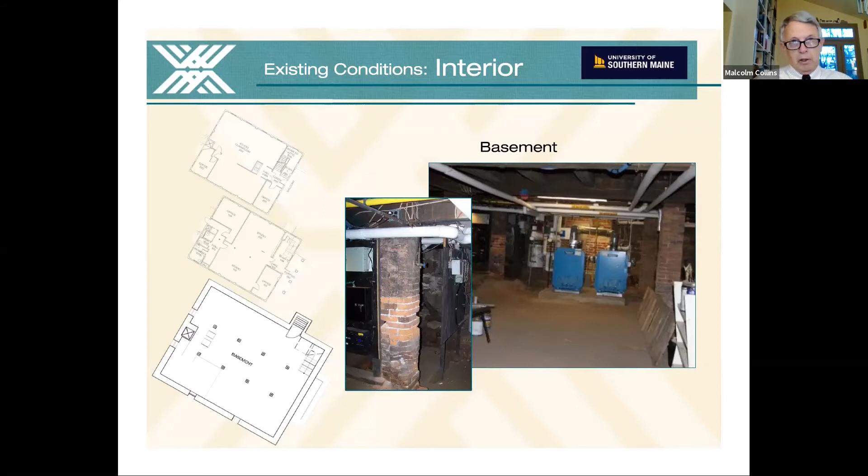Nothing, just the examples of the heavy timber framing in quite good condition. Foundation walls of granite rubble faced with granite slabs on the exterior and brick on the interior. Very little water damage. There was some evidence of some movement on one or two of the walls, but nothing out of the ordinary. Next slide.

And here you see some details of the foundation. One of the fun parts of HSRs usually is getting to draw up fairly accurate base drawings. Rarely do they exist, particularly for a building of this vintage and this sort of rural vernacular federal style building. But of course, as you can see here, there have been modern systems introduced into the building.

But on the upper right, you see the granite slabs that provide the exterior face of the foundation. Just some grouting and mortaring problems there to speak of. Nothing terribly significant. Next slide.

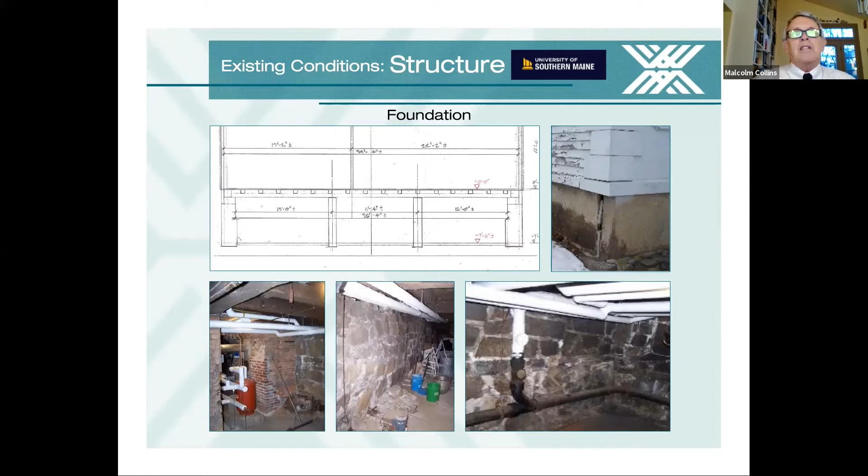At the interior, this building, when we get to the exterior, I'll talk a little bit more about its significance and its importance. But the exterior, for a town of Gorham's size and sort of the frontier nature of it, is quite a grand exterior. But the interior was very plain, and to the extent that we could do interior research, we really didn't find any. We were not able to do color analyses and decorative finishing analyses.

So we don't know, for example, if the stair hall was originally decorated with paint or gilding or anything of that sort. But still, there are a few flourishes, like the decorative trim underneath the stair treads, and the stairway would have been the only space of any decorative interest. You see the floor plan there.

In the original plan, there were only two spaces. The little office down in the lower right-hand corner may not even have been constructed originally, but was built within a year or two. And then the rest of it was just an open space with the stairway in the corner. And there was a two booth privy on the back of the building, which would be the upper left. It's no longer existent, but we know it was there until well into the 1890s, and probably later than that.

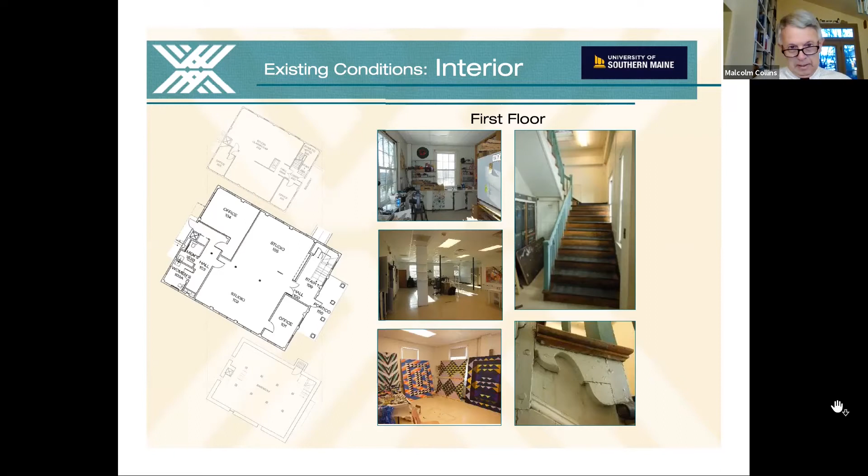It's quite a flexible space for them, you know, big space with 3 columns in it, 2 columns in the major studio space. So quite easy to use. And if we can go to the second floor, next slide. Second floor is even better flexibility wise because the massive trusses that hold up the roof and the ceiling made columns unnecessary at the second floor. So it's a wide open space.

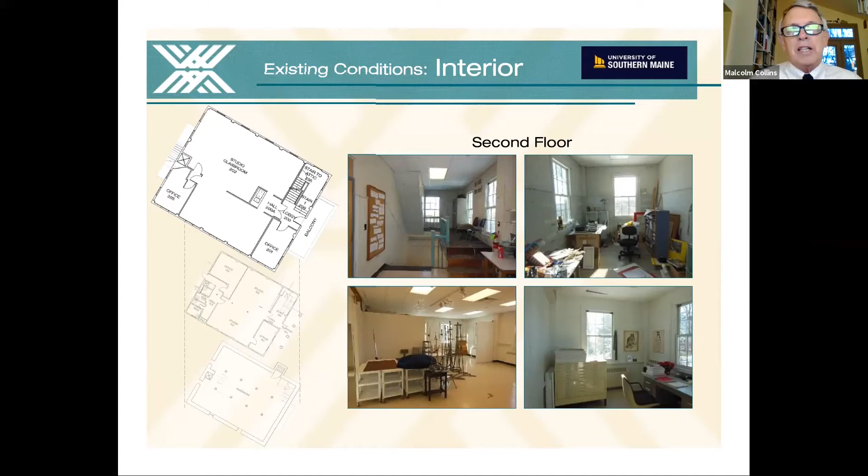The stairway was enclosed probably around 1822, and the office remains there. And then in the more recent past, another office was added to what would be the southwest corner. Again, you can see what seems to be comfortable living arrangements for a couple of faculty members and great studio space for the students.

Next slide. So the structure, I'm not going to get into too much of that because I'm not the expert, but it was quite heavy wood construction. You can see the basic outlines of it here. In pretty good shape. The usual problem with these kinds of structures, which were built with quite large cross sections of heavy timber, as you can see in the photo in the upper right, is, of course, the section modulus of them, in other words, their proportions of width to height, was not very conducive to overall strength.

So in the case of this building, there's some 12 by 12s, which sound like they ought to really be able to support a huge load, but in fact, because they're square instead of rectangular and they don't have enough strength in tension on the underside, they quite often need reinforcement if they need to be brought up to current codes. In this case, because we are not changing the use of the building, and, you'll see when we get into recommendations, we're not proposing huge changes, we will probably not be required to do much in the way of reinforcement.

Here's a picture. Go ahead, Ellen. Yeah, this was a really interesting structure. It's basically a timber frame. So there are columns within the walls. They kind of jut into the space a few inches, probably jutted in a few more inches originally, but there's been some material put on the walls to use for tacking and whatever.

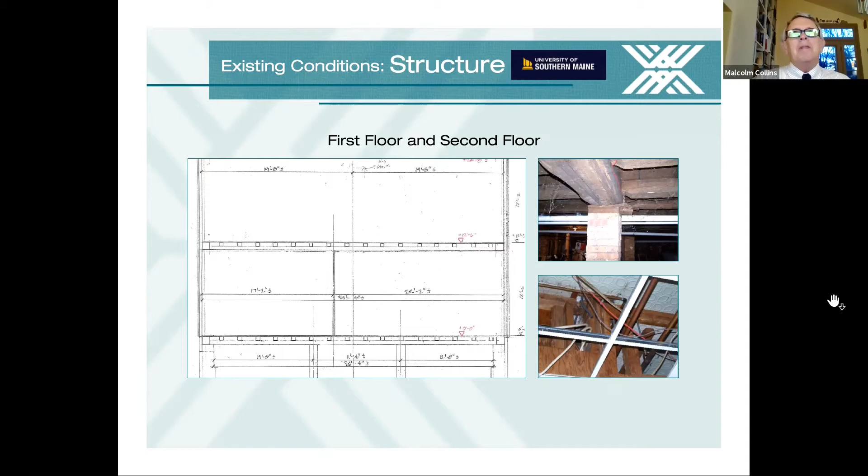Okay, thank you. Next slide. Next one. Thank you.

HVAC and electrical, mechanical, I won't spend much time on that. It's basically all new systems, reasonably well introduced into the building in terms of impact on character defining features. I certainly can't say it's terribly efficient in the overall scheme of things, but they have managed to keep the building serviceable. It should have some energy retrofitting. There are things that can be done without damaging character defining features that will be part of some of the future projects.

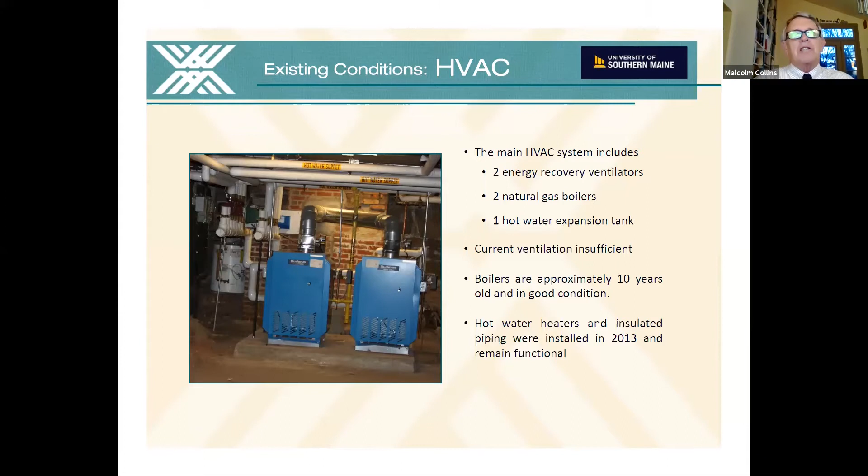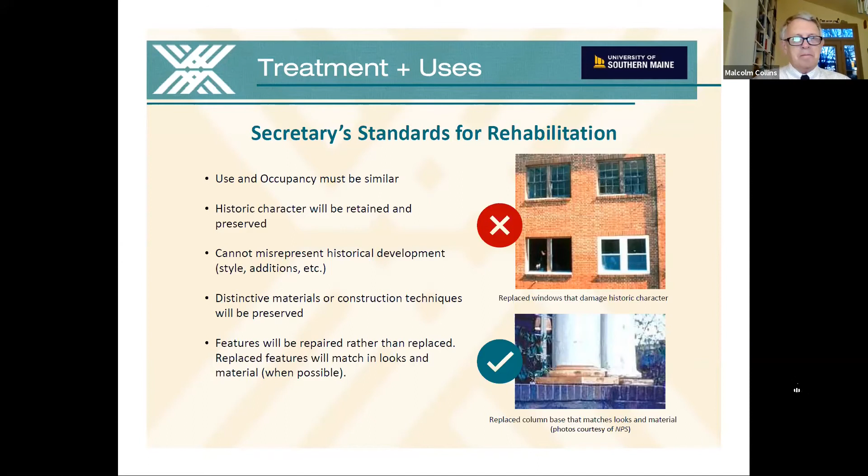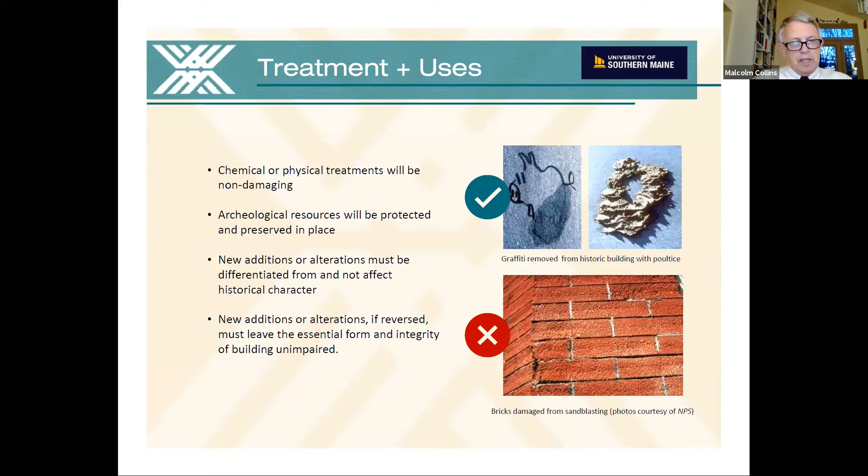Next. So based on the existing conditions analysis and the consideration of the different treatments, and choosing preservation on the exterior, rehabilitation on the interior, if we had to choose one to apply to it, it would be rehabilitation, because the preservation can fall under that. We were asked to make recommendations on projects to bring the building up to its original conditions, really, and then to allow the interior to continue to function in its current use.

So we developed several projects. Those of you familiar with the funding issues at the university system will understand that they hoped that we could put our recommendations in terms of several small scale projects that could be budgeted over a period of years based on priorities we helped them establish. And so that's the direction that we took. So I'll describe the projects a little bit. Project one, next slide, please.

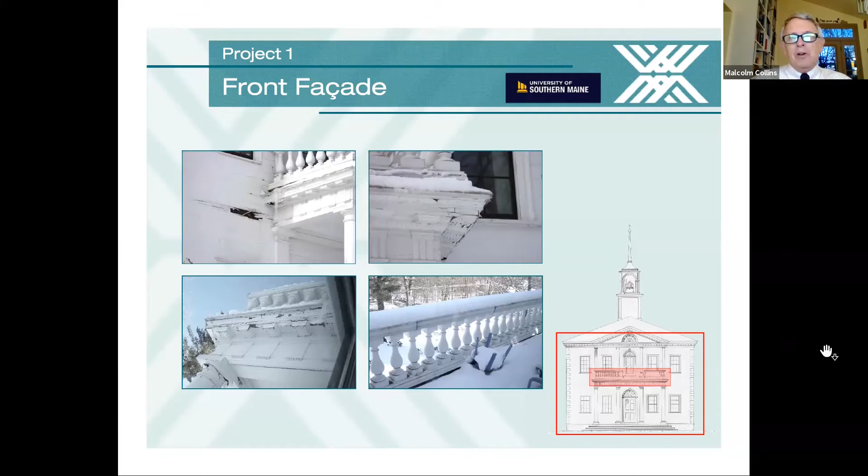Project one looks at some of the issues that I mentioned, and the red rectangle around the little elevation in the lower right-hand corner shows this is the east elevation, and this will be the first project. These have the most imminent repair issues. In fact, the column on the right-hand end of the portico, when we first visited the building, was lying on the ground. And so they recognize the importance of restoring that front elevation, not to mention it puts a good front on the project, very prominent location, highly visible, showing that they are being good stewards of the building, and also hoping that they'll get some fundraising help. Next slide.

Some more down at the front porch level. The front porch deck is some very large granite slabs. As near as we can tell, there's not a whole lot of structure under them, but we were not really able to get access to what's under there as part of the project. But rotting at the bases, the slabs moving around, the step treads needing some work. So that's project one.

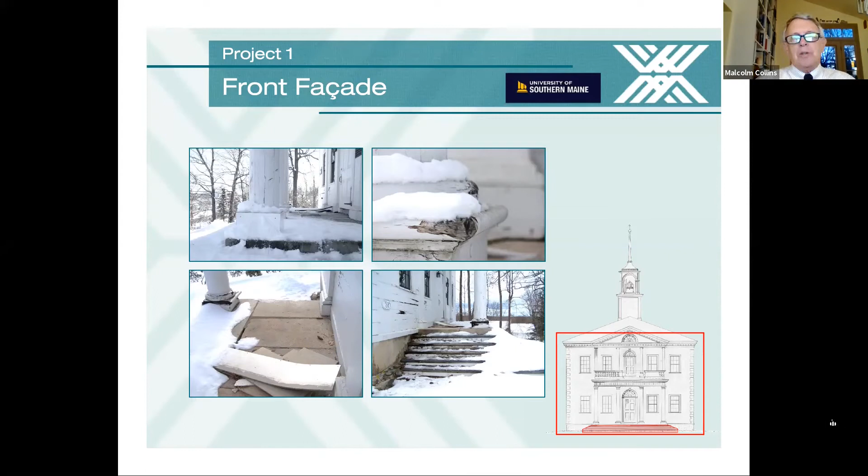Next slide. Project 1A involves going up and getting into the pediment and the balustrade and the roof of the portico, with gable face and details and flashing trim, of course, roofing, porch railings, the soffit, building siding, and painting above the second floor. So a fairly extensive project, but a really worthwhile one. Next slide.

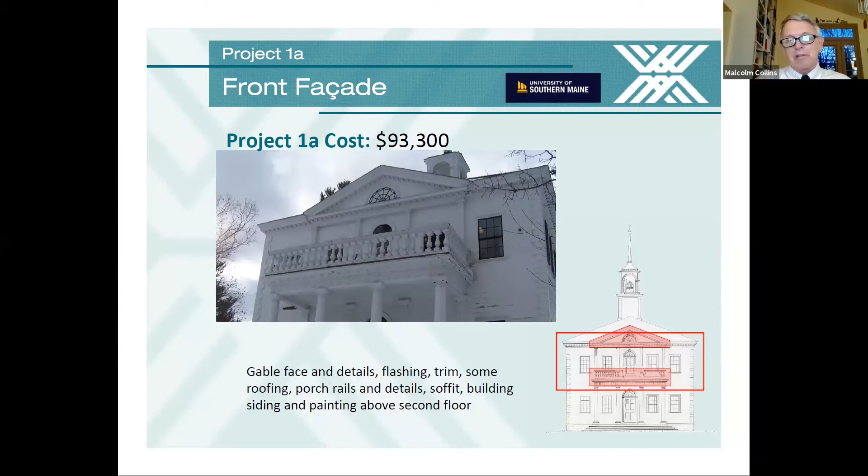And you'll see the cost estimate there of $93,000. A very important part of the project, and typically of an HSR, is to do some cost estimating once you've developed your recommendations for scopes of work. We hired a cost estimator and had a very thorough process applied to these projects, and we're pretty comfortable that they're realistic. And the client, the owner, was quite pleased with the scope and the size of the various projects. Next slide.

So then project 1B for the lower part, the steps and everything, next slide, worked out to be just about the same number. So about $180,000 to do the entire facade. Next slide.

Then we continued on the exterior for the next project, siding restoration. Much of the siding was in, I'd say, fair to good condition at best. There is quite a bit of it that may need to be replaced. We'd like to leave as much original up as we possibly can. You see the sort of feathered joints of the clapboards, the horizontal joints, which when they were new and painted, you couldn't even see any joints in the clapboards. So we'd like to get back to that as a character defining feature. Next slide. And so for exterior siding, we're looking at about another $85,000.

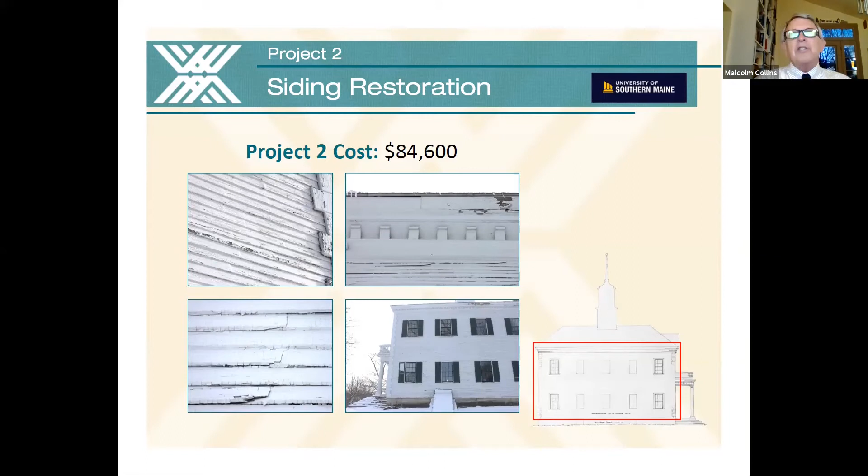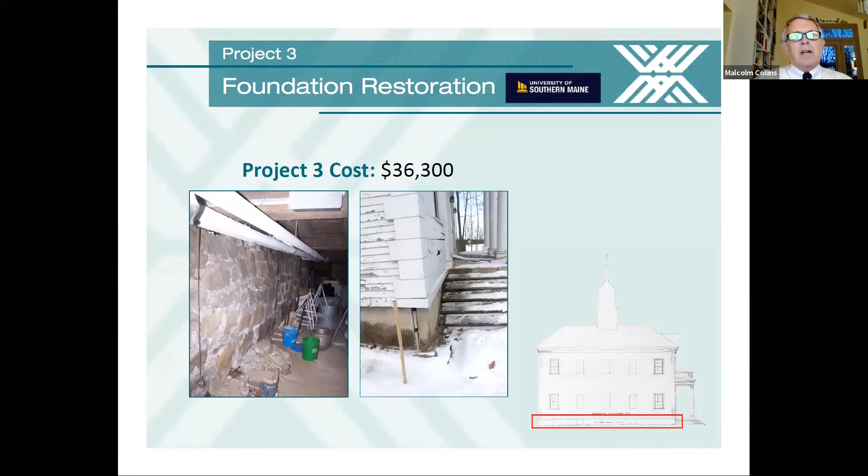A fairly significant amount, but again, not anything we would not have expected. Next slide. So the costs there are about $36,000. Next slide. And then going up to the top of the building, the roof and the cupola. We were not able to evaluate that as much as we would have liked, because at the time we were doing the condition analysis, the roof and everything was covered with much more snow and ice than you see there. But we were pretty sure we have a pretty good scope of work on that. Next slide. And that comes out to be, say, $50,000. That's really the end of the preservation-oriented work and restoration-oriented work.

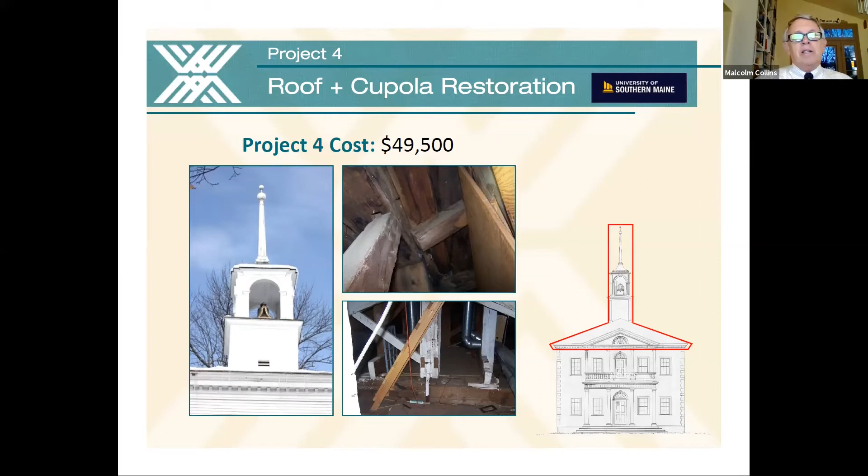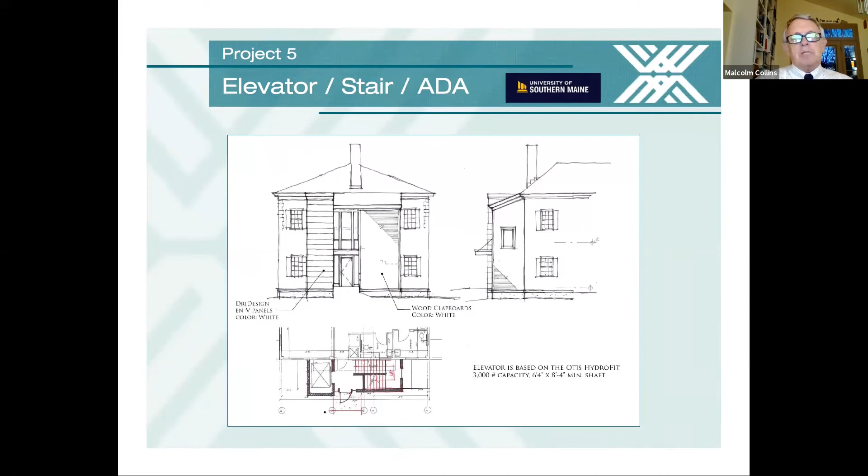Going to the next slide shows moving into something probably further out, certainly after the other projects are finished, in the place of where the Privy Tower used to be. We're proposing to put a stair tower and elevator. There is no elevator now, and the second means of egress is a fire escape on that back side of the building. So this we would see as a fairly important project to be put in the budget down the road a little ways. Next slide. And that project would be a little over $400,000.

And then one more project. I mentioned that the stairway would appear to be the only place where there was really much in the way of potential for decorative work in the past. And so we're suggesting, really wanting to have an interior project that would allow us to restore a space back to the original finishes. And so we chose that front stairwell.

One thing I didn't mention was a major part of the 1909 renovation work was that a pressed metal ceiling was installed in almost the entire first and second floors. That is still in place above a suspended acoustic ceiling. And it's certainly restorable, you can restore that material fairly easily. There is new material available, but that's kind of a flourish as opposed to these other projects. But the interior stairwell, to get it back to its original condition, next slide, would be about $80,000.

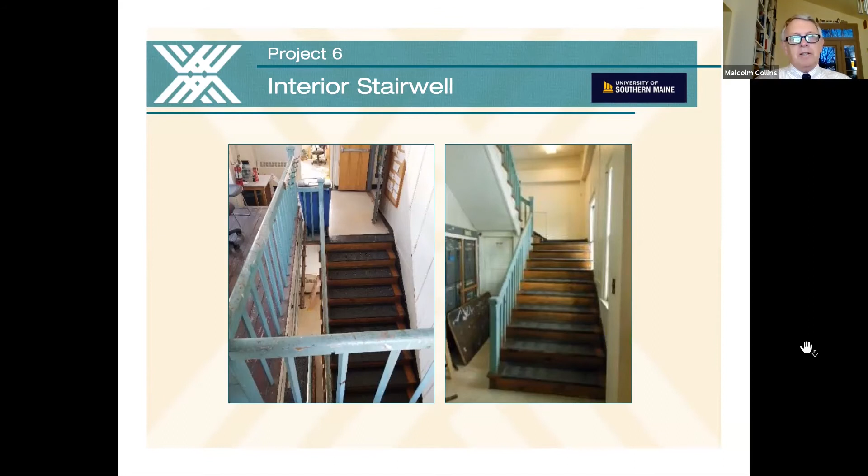So that's the scope of our explanation of what an HSR is. I think it's a fairly typical one, and hopefully it will be the first of several that will be done on the university campuses, and hopefully it has explained the concept and doing one might be a help for you in the buildings you're taking care of.

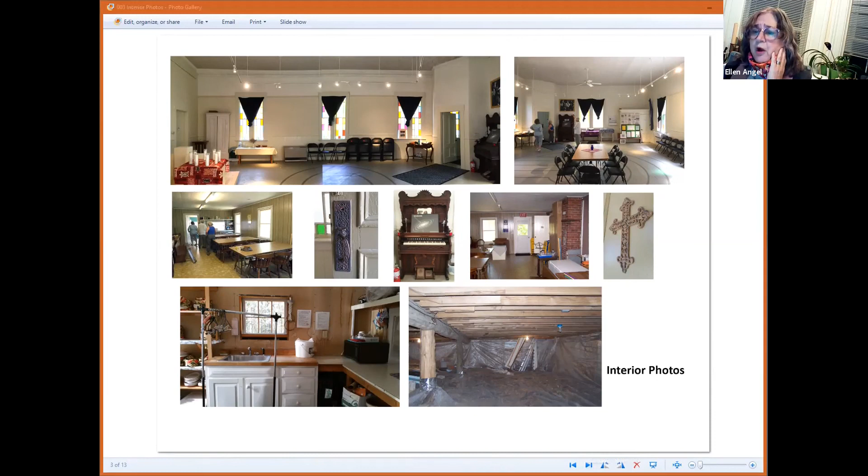So this is the interior, and it has lots of lovely details in it. Typically, in the past few years, someone from Maine Preservation, the private group, has come out and done pre-assessments before we were contacted to do these assessments. So a lot of the historic documentation was done. Or if these buildings are on the National Register already, they typically have the character defining features listed, although a lot of the ones that were put on really early don't. So we do have to note what those are.

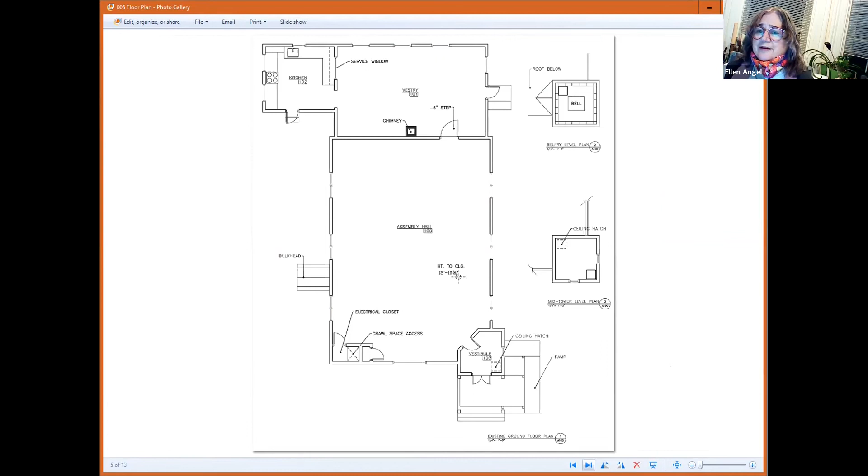Okay, so we create floor plans, which is what we did at Academy Hall. This is an example of this one. It's very simple. We don't do a real architectural set of drawings as much as just make sure we have the conditions all described. We take photographs and rectify the photographs and describe the elements so that we can, in this case, show the character defining features.

I just fell in love with this church because it's so lovely, and it has so many nice wood features. Everything from the decorative shingling, the change in shingling and siding from the different levels, to the applied stick work and the decorations on the barge boards. Everything was just lovely. So we tried to document that in a way that is simple for everyone to see.

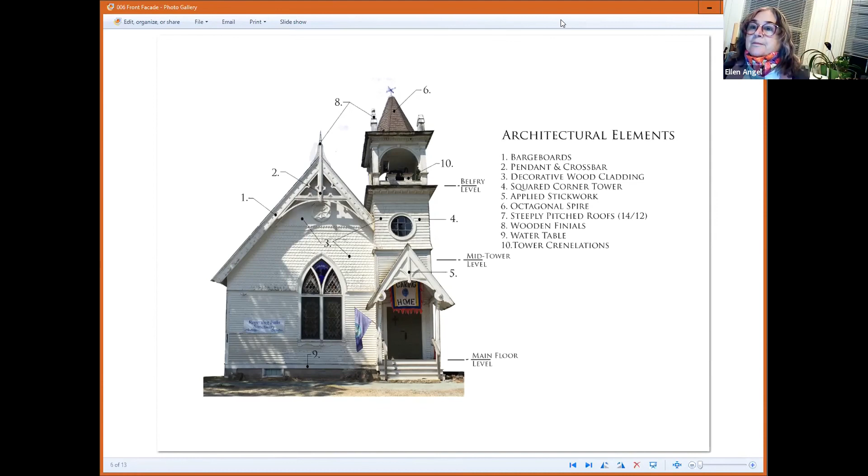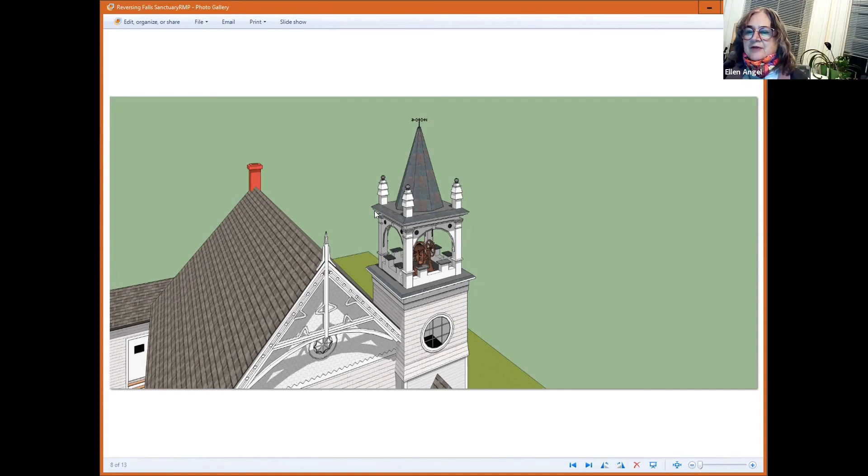Then, in this case, we don't always do this, but we created a 3D model because the problem was with this corner of the steeple, and we were trying to understand how the steeple worked and how that condition worked. So kind of fly around this, and really it was right here that was the key issue, and how the water was directed and where it was directed.

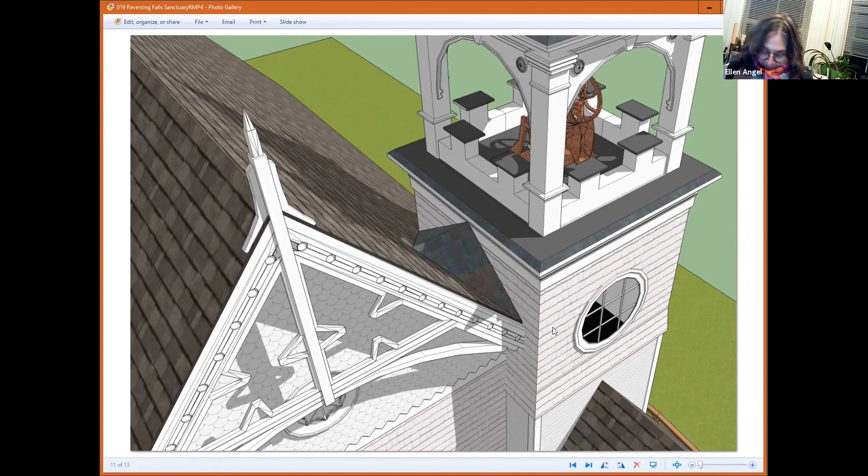So we see this a lot, where between the steeple and the roof, the water gets directed right in this little corner right here, and we lose a lot of steeples in that situation. And it's not really an easy fix. It's not necessarily an attractive fix. Oftentimes we have to put a downspout there. But it does fix the issue.

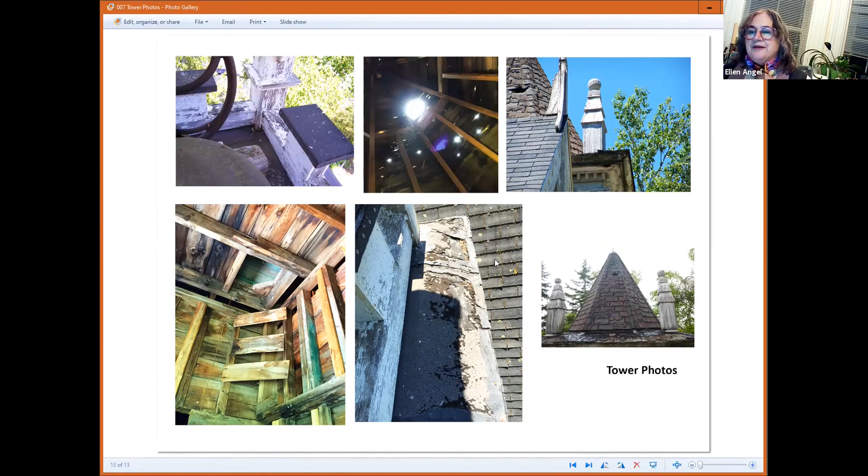But the key difference is, I think, scope. The historic structures report is really a historic document that documents for all time the history of that building. A historic structures assessment is a document, a snapshot of an instant in time. And it includes a lot of the same things as the HSR, but a lot of things it doesn't include.

Great. Thanks, Ellen. Any questions from the audience for either of our speakers? That was really illuminating. I hope folks found this useful, because I did, for sure. They're pretty quiet. They're still with us, but they're quiet. So you guys have crushed it.